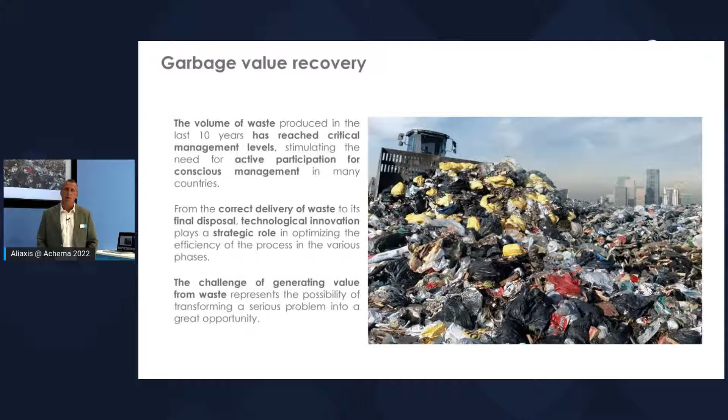We know that the planet is getting more and more crowded, and so all human activities generate rubbish in solid form as well as in liquid one. These last 10 years, the amount reached a critical level, awakening a sense of duty for a cautious management of garbage.

The process of rubbish management is quite long, starting from a correct delivery up to its final disposal, trying to maximize the amount of recycled material. This is a challenge for sure, the challenge of generating value from rubbish. It's in some way an idea to transform a problem into an opportunity, chasing in some way the myth of King Midas, who converted into gold everything he touched.

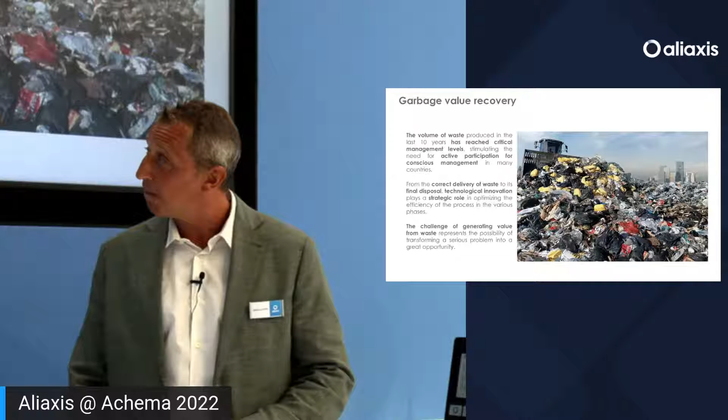To be more precise, today we are going to see a project related to the precious metal recovery from e-waste, but I think it's important to get a clear picture about the scenario that we are facing.

Every year, 54 million tons are generated worldwide, and the European contribution is set at 12 million tons. So really a huge amount of e-waste.

But what is e-waste? E-waste is the mobile phone that you have in your pocket, it's the laptop that you are using to follow this speech when they will get aged, as well as all the electronic devices that you use every day. The increase per year is set at 10%, expecting to reach 74 million tons at the beginning of 2025.

Who are the main contributors? Basically the United States, where the contribution is quite stable. Europe, in this case, the deployment of new guidelines and new regulations is helping to maintain and reduce a little bit our contribution. China, where instead the contribution is increasing a lot, and let me mention also India among these countries.

What are the main sources? For sure, the urbanization and the correlated industrialization, not forgetting the disposable products, and considering also the high innovation pace placed on electronic devices.

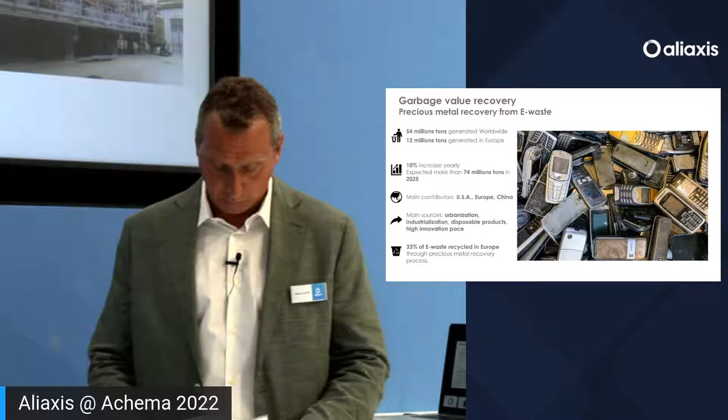The process that we are going to see is the complete renovation of a plant dedicated to precious metal recovery. The metals extracted are different: gold, platinum, palladium, rhodium, ruthenium and iridium, in addition to copper, nickel and also tin.

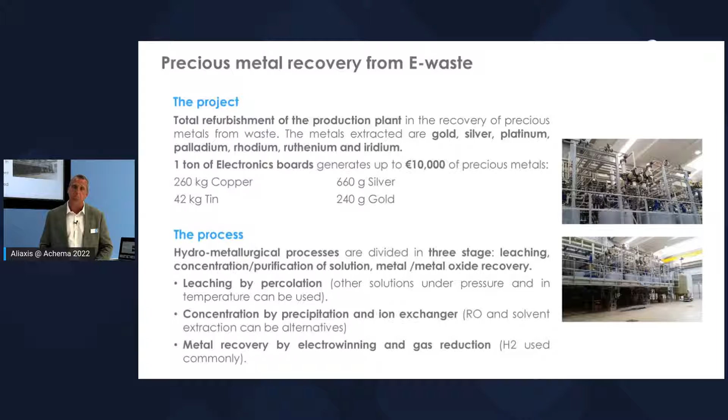Just to have an idea about the potential of this business: from 1 ton of e-waste, we are able to get a really high weight of precious metal, and the value is around 10,000 euros. In particular, we are able to get more than 250 kilograms of copper, more than 40 kilograms of tin, and again for what concerns silver, more than 600 grams, and almost 250 grams of gold.

Which is the process? The process is a hydrometallurgical process that can be divided into three different stages: the leaching process, after that the concentration and purification of the solution, and finally the metal oxide recovery.

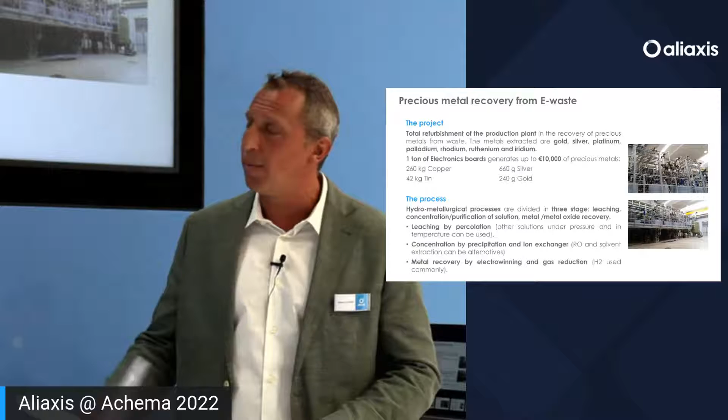The leaching used for this plant is by percolation, but a similar process can also be used under pressure or in temperature. For the concentration, we use precipitation, ion exchange, but also reverse osmosis technology can be applied. And then finally, the metal recovery by electrowinning or by gas reduction, using hydrogen as the gas in this case.

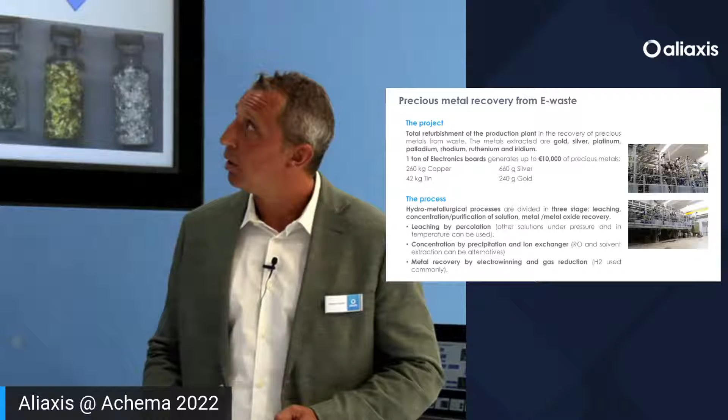Just to understand better the process flow, it's quite simple: starting with a mechanical pretreatment in order to fracture the PCB, the e-waste. This process helps increase the contact surface of these parts with the acid leaching, increasing the efficiency of the process.

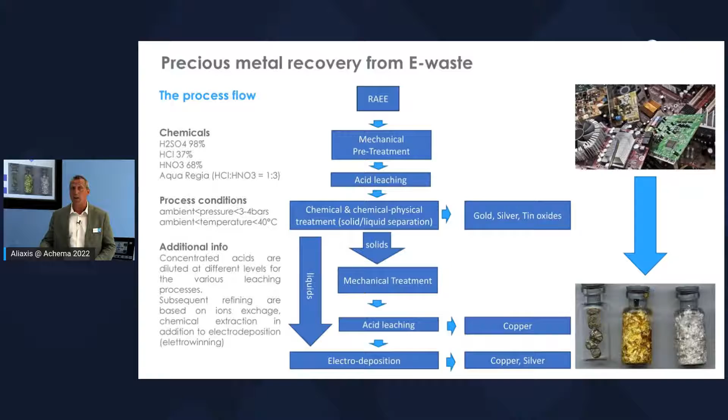Then there is a separation of the solid fraction from the liquid one, and we can start to get gold and silver, basically. Then the solids are further fractured in order to again increase as much as possible the contact surface.

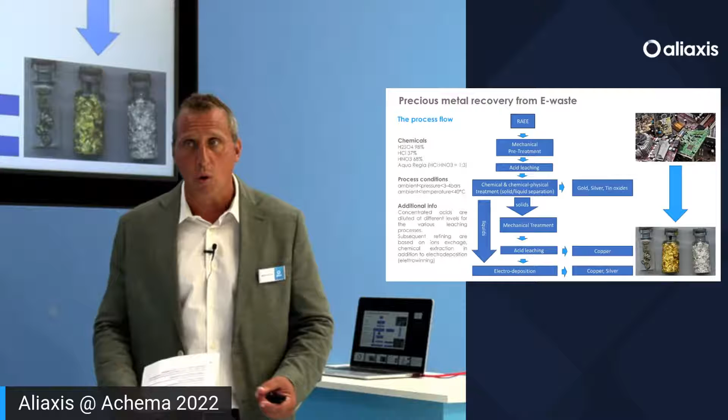And again we can proceed with acid leaching. All the liquid fractions are gathered, and so we can proceed with the electrodeposition, the electrowinning, the electrochemical process that can help make them more pure. As you can see, many aggressive chemicals are used: sulfuric acid, hydrochloric acid, nitric acid. So for sure we are speaking about aggressive fluids, though the process conditions are not so demanding.

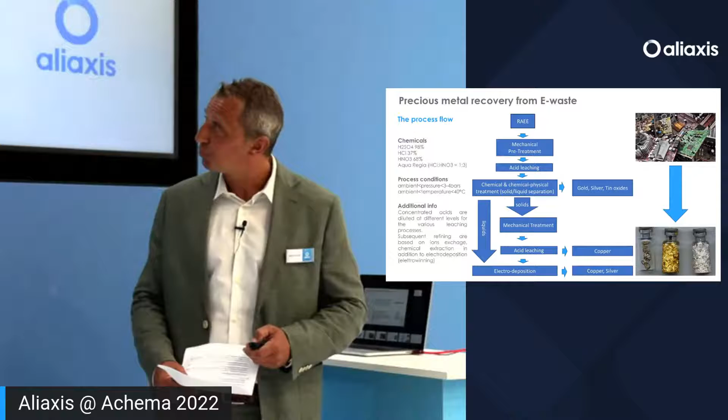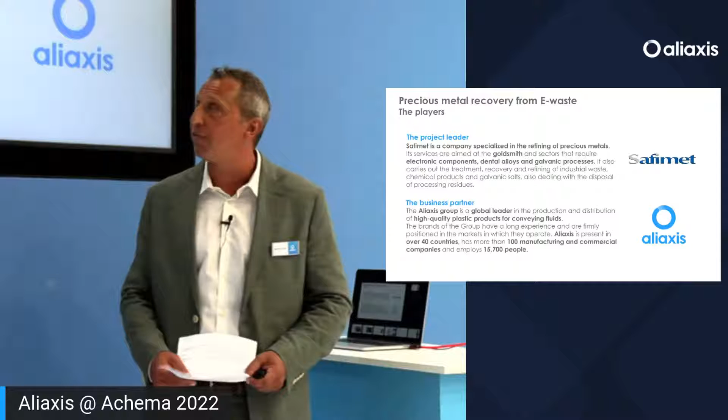We can go on introducing the players of this project. Let me mention the project leader, that is Safimet. Safimet is a company focused on refining of precious metals, offering services to goldsmiths, but also to all the companies dealing with PCB and with galvanic processes.

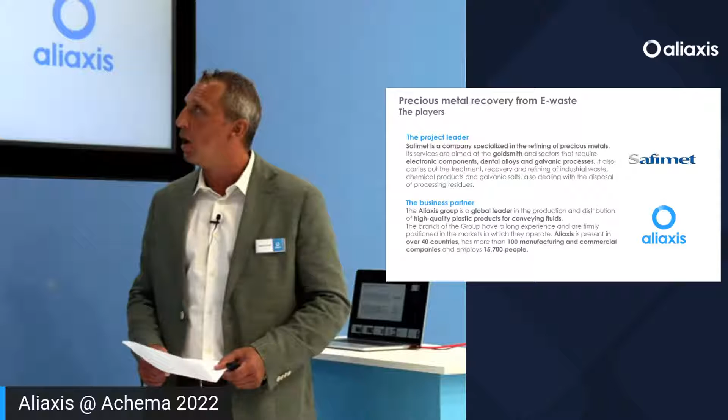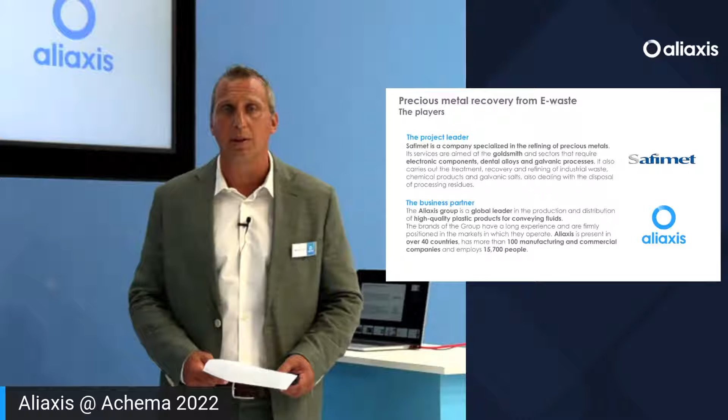On the other side, the business partner is Aliaxis Group, a well-known international group who produce innovative thermoplastic systems for fluid conveying, present in more than 40 countries with 100 different manufacturing units or commercial branches, employing more than 15,000 people.

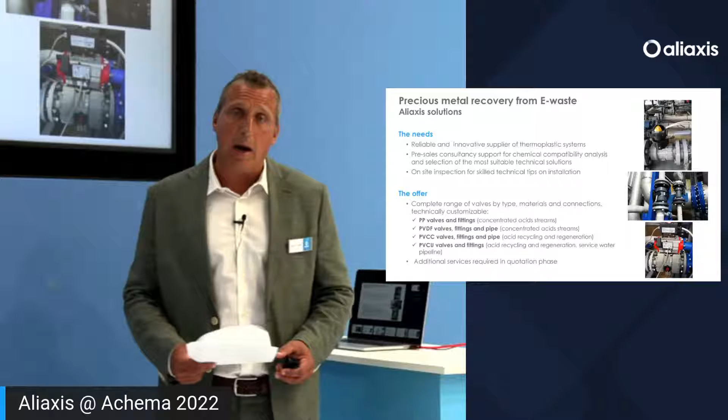Let's go on diving deeper into the dynamics of the process, starting by defining the needs of the project leader, Safimet. They were looking for a reliable supplier for thermoplastic systems, as we have seen that really aggressive chemicals are applied for this process.

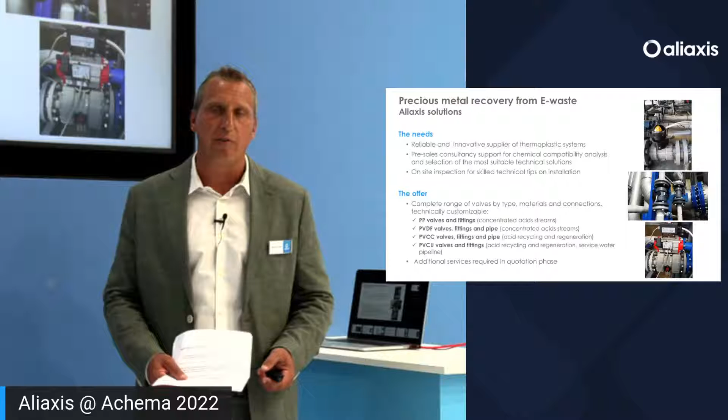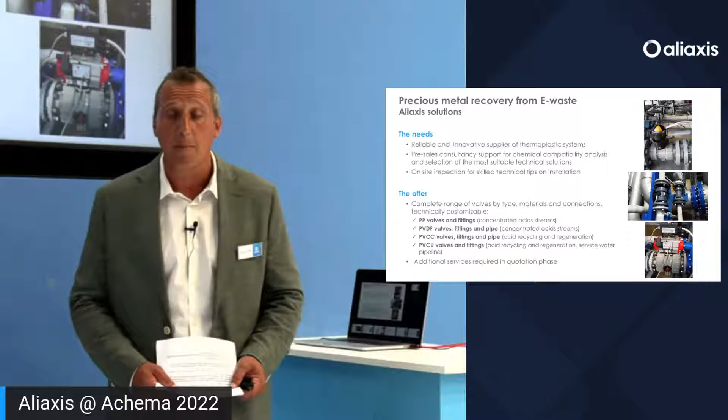Plastic is for sure the best option, but they were also looking for a company able to supply consultancy, to make an analysis related to chemical compatibility in order to define the best thermoplastic solution, offering high performance in a safe way for a long time. So we offered these services, and we supplied them polypropylene valves and fittings, PVDF and CPVC valves, fittings and pipes, and also PVC-U valves and fittings.

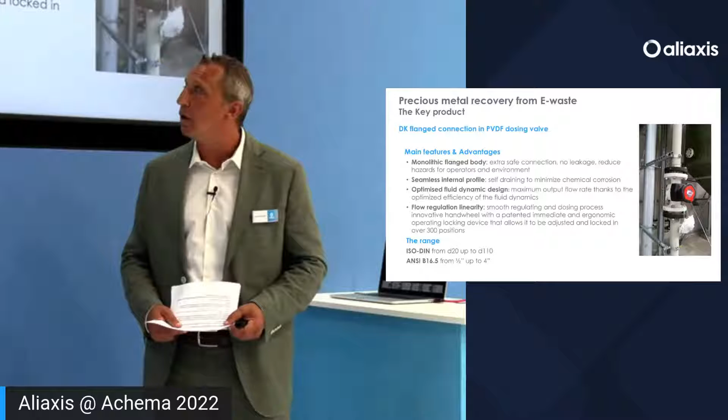In each story there is a protagonist, as well as in each project there is a key product. In this case we decided to select the DK. The DK is a diaphragm valve, a very special diaphragm valve, in this case flanged and in PVDF.

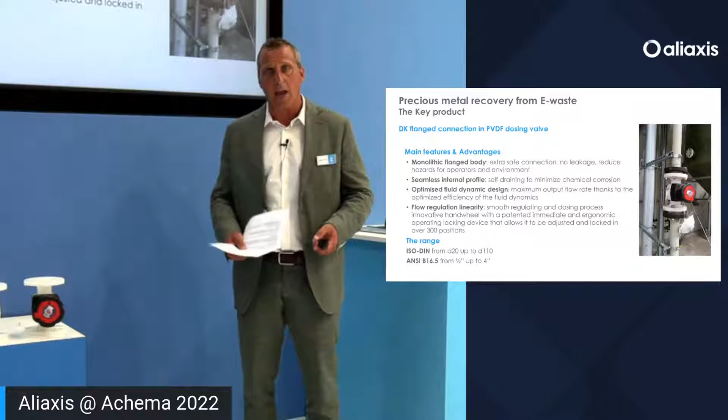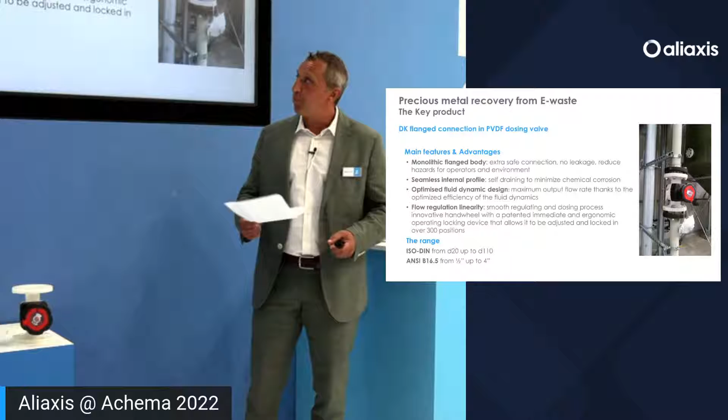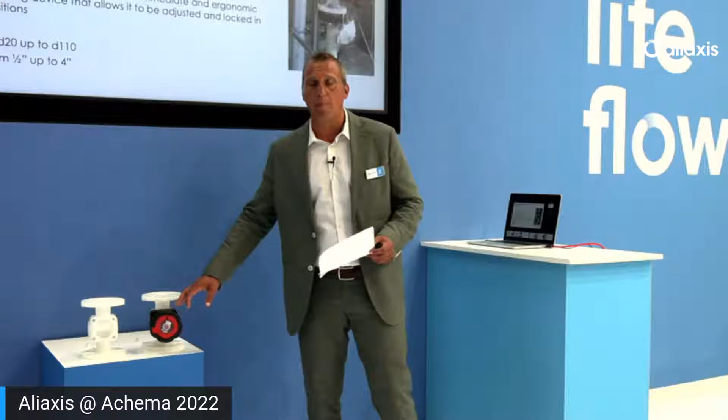The monolithic body reduces the hazard for operator and for the environment. A seamless internal profile provides a self-draining effect that can prevent corrosion. Then the optimized fluid dynamic design, thanks to a special internal shape of the body, can reduce pressure loss, and more than 300 different positions of the membrane can simplify the procedure to find the proper hydraulic balance.

Available in different thermoplastic materials: CPVC, UPVC, PVDF, polypropylene, with different process connections. In this case we mentioned the flanged one in both main norms, ISO and ANSI.